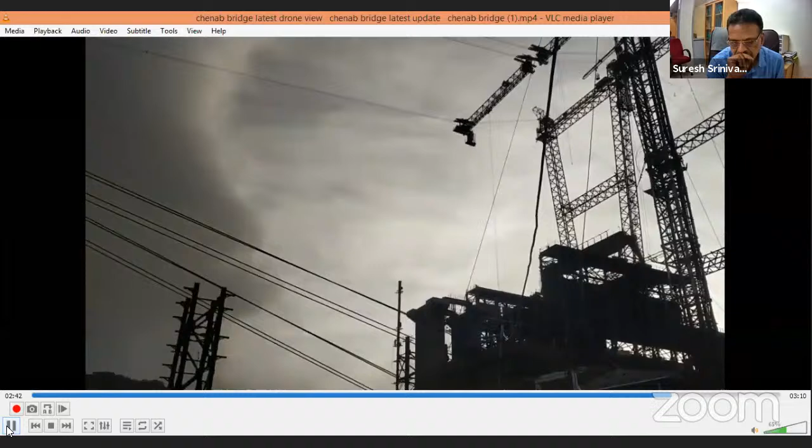So that is the latest position.

Are you able to see my slide? Not yet, no, you are not able to see. Look, the video clip ending is there. Now it's visible, sir. Now your slides are visible, sir.

So you saw the video. That gives you the latest position of the bridge where you saw the arch. The whole bridge contains three major groups of structures.

The voice is not audible. Now your voice is not audible. You have to come close to the mic, or some adjustment you have to make. Am I audible now? Okay.

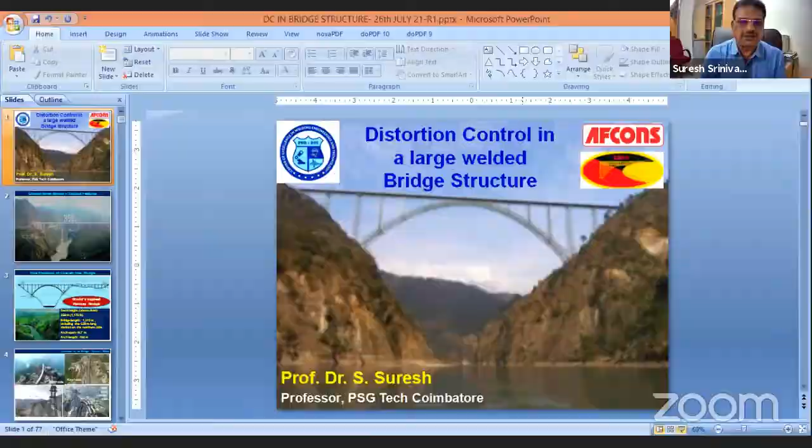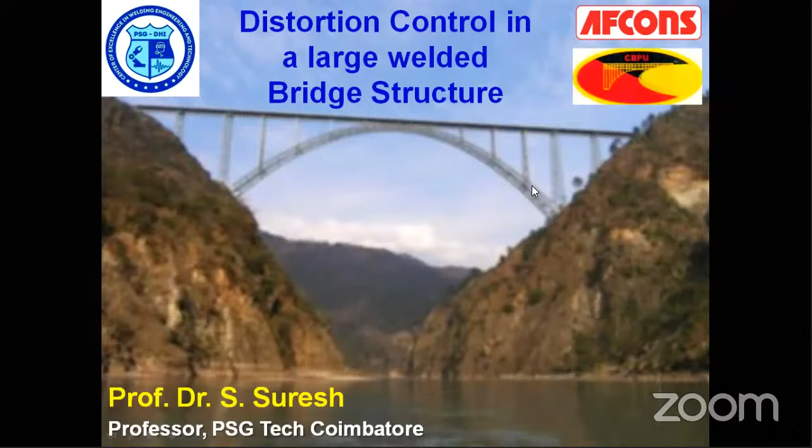Right, so what you saw is the arch of the bridge. The arch is the main structure which is going to take the load. You see the pier, which are the vertical sections. These vertical sections end up at the same plane where the deck structure is going to be installed and commissioned. So the top flat is the deck structure. The vertical supporting structure between the deck and the arch is called the pier, and then there is the arch structure. These are the three basic assembly structures of this bridge.

As you can see, and as you would have already seen in the video, there is no support on the river bed. So it is supported on either side of the mountain with a huge foundation, which is more than 30 to 50 feet or so. It's a rock and complete terrain environment.

Hello? I think everybody has to switch off their mic so that you can hear me.

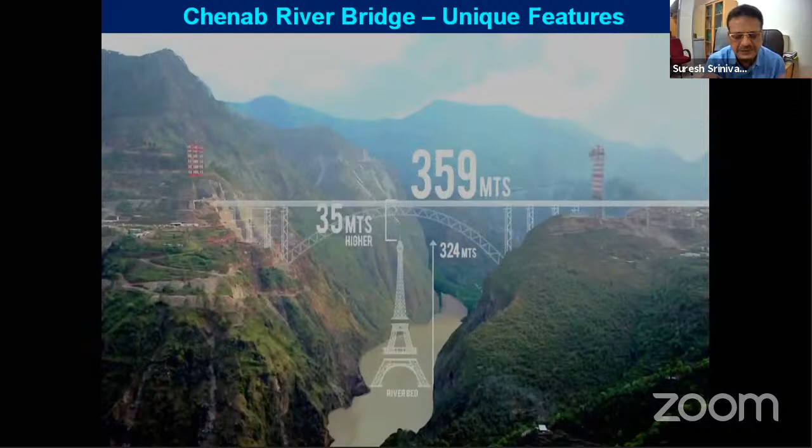This Afcons Infrastructure Mumbai is the main contractor who has taken up not only this bridge construction but, on either side of the bridge, there are two tunnels. On the left side, the Kauri side, and on the right side of the bridge, you have a 5-kilometer tunnel. 5 kilometers, please note that. It comes through two mountains, and the railway line is coming from Katra, Reasi to this place. After crossing this river, it will go through another tunnel of 2.5 kilometers. It's a very exciting project, which is going to be the icon of Indian construction of such a bridge.

As you see here, on one side you have a hilly terrain, not flat ground but an up and down mountainous terrain, so there are a lot of concrete piers coming here. Similarly on this side, you have the Kauri side with the 5-kilometer tunnel, and on the left, another tunnel on the Bakkal side. This is the river, and you have the arch, the pier, and the deck structure. So this is the overall elevation of the Chenab River Bridge.

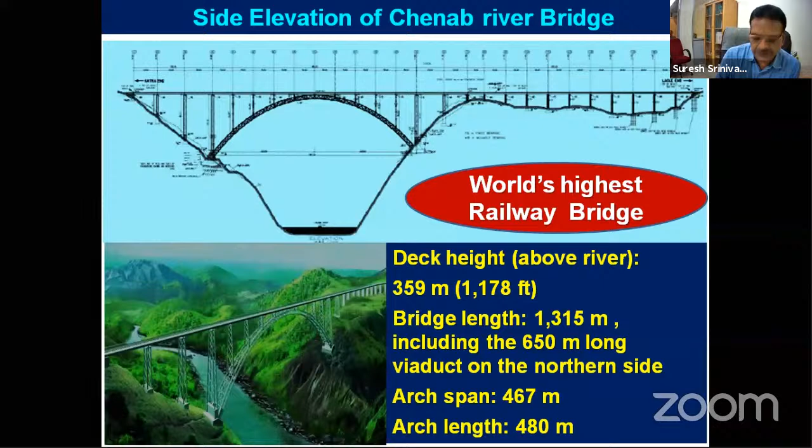Now you can see, as shown in the video, at the moment the arch is already fabricated and erected. All the three structures are welded and joined using high strength friction grip bolts, joining two typical structures. So it is a welded, bolted structure of the bridge.

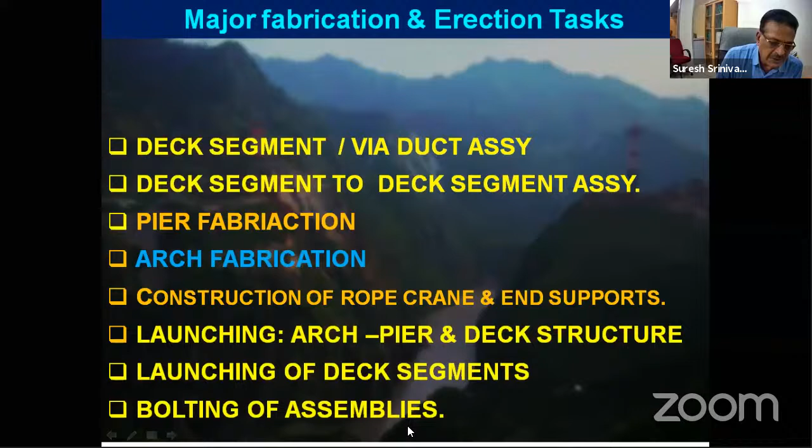And then we have pier fabrication, arch fabrication - I'm sorry, there's a spelling mistake, I'll correct it - construction of rope crane and end supports, launching of the arch, pier and deck structure, launching of the deck segment, and bolting of the assemblies. These are the major fabrication tasks that you have.

Coming to the challenges, this is a welded and bolted type of structure. The first challenge is you cannot transport a prefabricated structure to this site. As I told you, with the very narrow roads and lots of hairpin bends, you have to fabricate it near the bridge erection location.

Fabrication yards had to be constructed at the site, and all resources had to be moved from ground level to the site, which is about a 4 hour journey from the Jammu site. Handling facilities are inadequate, and environmental conditions are very harsh - pretty cold at night, hot in summer - and proper roads are not available. Launching of structures and erection is the toughest challenge, and it is planned from both sides of the bridge.

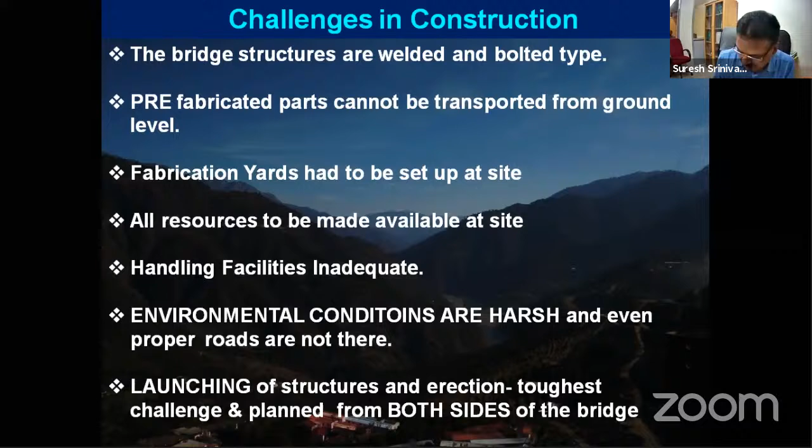Practically around 25,000 tons of fabrication was involved with welding and bolting. We fabricated 3 major assemblies: arch, pier, and deck structure. The materials used are E250 C grade carbon manganese steel and 410C HSLA steel, that is high strength low alloy steel, with a fine grain size of 7 and 8.

We had to choose this steel because in the arch structure we required very good toughness at -40, that was the design criterion. Thicknesses involved are 12 to 115 mm in various structures. The construction code was BS 5400 - it's a European design, so all ISO standards apply here.

It is a fatigue loaded structure, so it is fatigue design, and construction was made as per Part 10 of BS 5400. All features of the weld joints were done as per Part 11 of 5400.

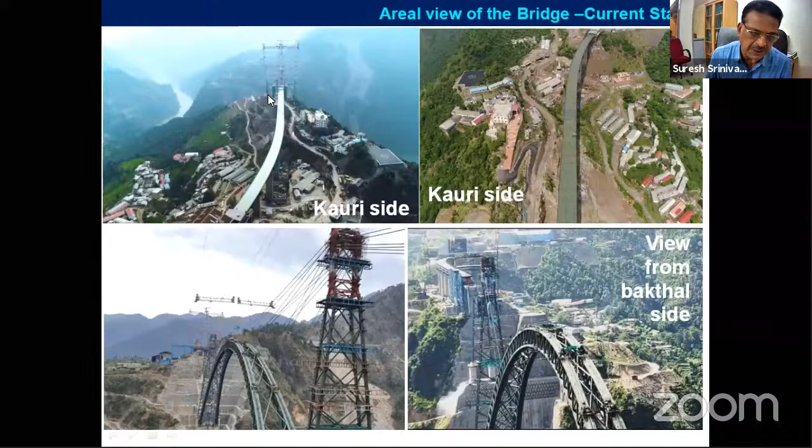The most critical requirement was distortion control, because the bridge has 2 curvatures. You would have seen this in the top view - if you look at this picture, you can see the curve of this deck structure in the ground. That's one curvature, and the other curvature is in the arch - you can see the arches are wider here, getting closer in the middle, and then becoming wider again.

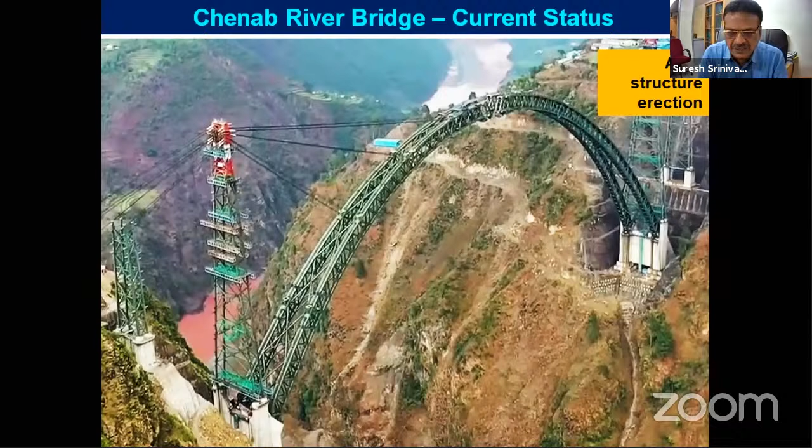So that means it is tilted inwards as well as there is a curvature outside. Both the arms of this arch structure are having an inward tilt, plus there is a curvature along the length. So it is a double curvature design to give an aesthetic view. This arch structure has got a double curvature.

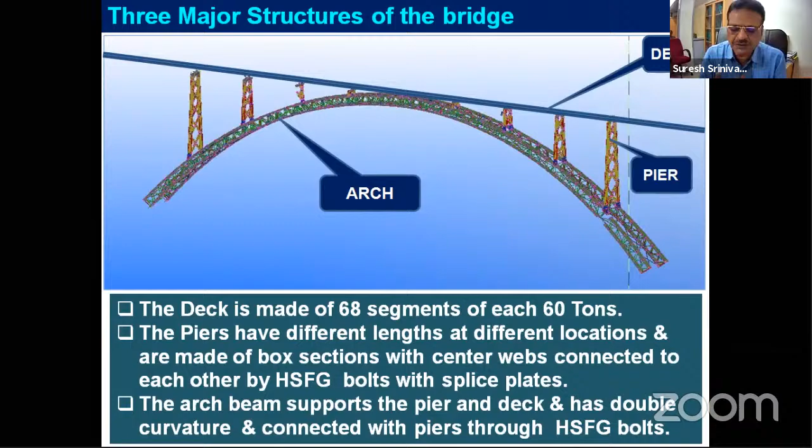Both the deck structure and the arch structure have got a double curvature, and the fitment tolerances, because you have to bolt each of these structures, plus minus 1 mm, 0.5 to 1 mm is the clearance given in the bolting between one structure and another. So this became a very big challenge, how we are going to control the distortion of this structure. This double structure had to be controlled in a very strict manner.

And we adopted both before welding and during welding methods to control this distortion. And we also did a lot of innovative things. As we go along, I'll tell you.

This erection had to be proved with a trial erection at the ground level, marking, then shifting it to the side. The welding procedure and the PQRs were done as per ISO 15614 standard, and the welding defects were evaluated as per ISO 5817. So completely European standards, ISO standards were used.

And I was serving, I'm still serving this Afcons structure as an IWE, that is International Welding Engineer support, which I am providing them. The welding processes used were gas metal arc welding, flux cored arc welding, submerged arc, stud welding, and SMAW to the minimum extent.

The maximum percentage of welding for these 25,000 tons was maximum SAW, next FCAW, stud welding, and minimum level of say 10% to 15% was only shielded metal arc welding.

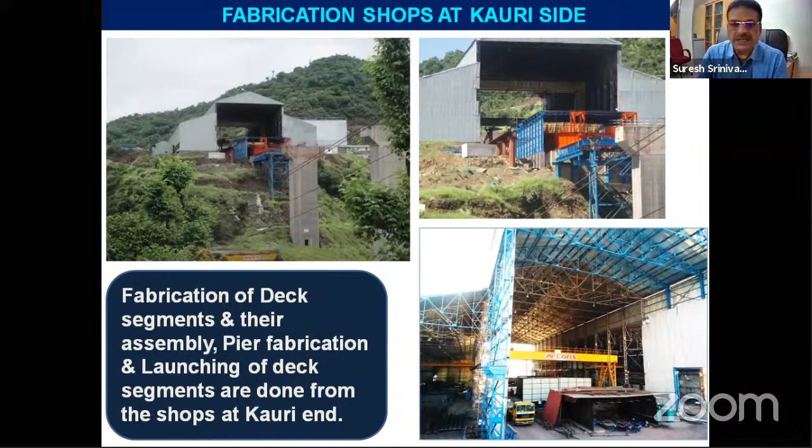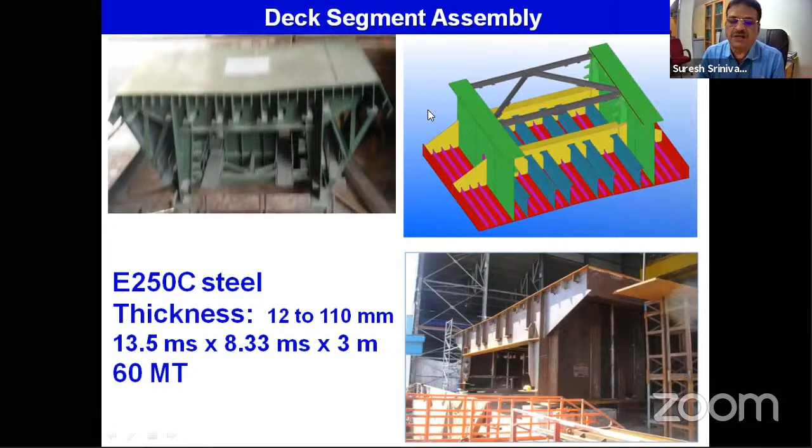So the total segment, and in the bottom you have box sections called lattice structure. This is one single segment, about 60 tons, and this segment contains about 25 longitudinal joints on the deck plate, about 8 to 10 butt joints in the deck plate, and box sections, lattice structure. Totally about 35 to 40 welded joints in this structure is what you see. Now you can see the Tekla, that is the solid model drawing of the whole structure, which again clarifies the type of structure.

So this is the deep webbed beam, this is the cross beam, and these are secondary beams, which are 6 in number. These are horizontal stiffeners, these are the cover plates, and the cross brackets between the main web and the edge of the segment. So this is the overall structure.

So what we do, we first make the structure, make another one, put it down on the erection bed, join them as an assembly, push it forward. The third one is first made, the first two are pushed out, third is pushed down from the shop level, then joined with the two pushed out. Again, the fourth one is made, put down, joined with the first one, two, three, and pushed along the length. So like this we keep launching: fabricate, assemble, launch, fabricate, assemble, launch. So this is the sequence of our fabrication.

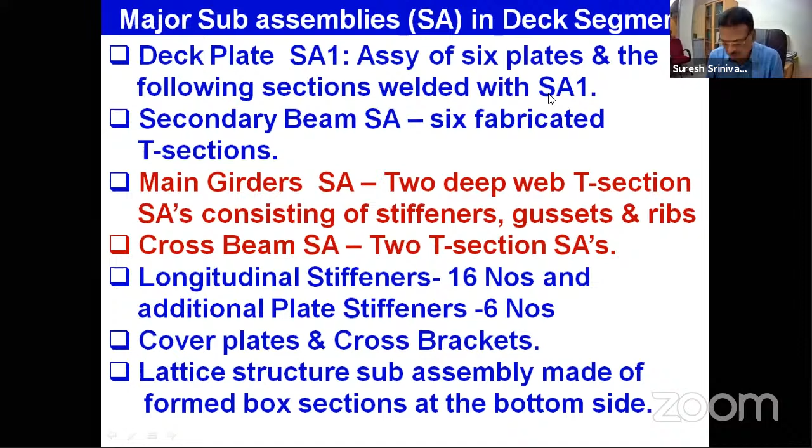So if you come to the main welding part, you have a deck plate subassembly which has 6 plates, and the following sections are welded as subassembly 1, where I'll show you now. For example, this is the base plate. The orange color is the base plate, where you can also see a small tilt in the diagram. This is not distortion in the figure, this is the pre-setting of the bridge, so that when rain comes, the water will automatically drain through the central hole. So you can also see there is a small curvature here. So these are 1, 2, 3, 4, 5, 6, 7, 8. These plates are joined together in this case.

Then horizontal stiffeners, longitudinal stiffeners are placed. Then cross beam structures are placed. Then vertical deep webbed girders are placed. So now you get the assembly. It is welded in a sequential manner, and then it is brought to this launch pad, and then it is lowered where it is assembled.

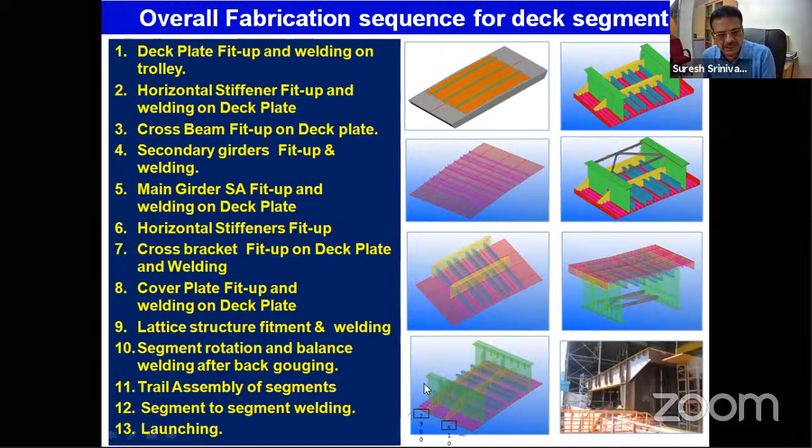So deck plate fit up and welding, horizontal stiffener, cross beam, secondary girders, main girder, horizontal stiffeners fit up - like this we go in a specific sequence. First deck plate is welded, then horizontal stiffeners, then cross beams, secondary beams, then cross beam to secondary beam in a sequential manner. In phase 2, we weld the horizontal stiffeners, cross brackets in a particular sequence.

We measure the distortion, and again, if there is a deviation, we change the sequence. In the second phase, we complete the welding so that the longitudinal diagonals, the squareness, the height, the width, and all the dimensions are as per the drawing. So this is what we have done.

So I'm getting into much more details now. So this is your deck plate assembly fixture, where we keep the deck plates and weld them. So you can see the curvature more closely. So here we have decided both the direction, the welding sequence and the weld sequence, such that the distortion is kept to the minimum.

And we used SysWeld software in our center to estimate the shrinkages. We could not use it for predicting the sequence, as for this structure, if you want to run an FEM analysis, we estimated it may take about 15 to 20 days. So that much time was not available. So we used this software for predicting the shrinkage, and then with my analytical method, we predicted the sequence and ran the sequence in the mockup. Once we got very good results, we applied it straight away into the actual structure.

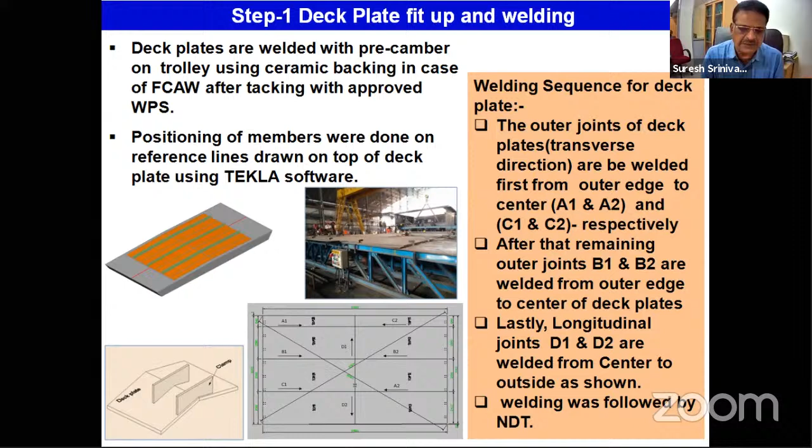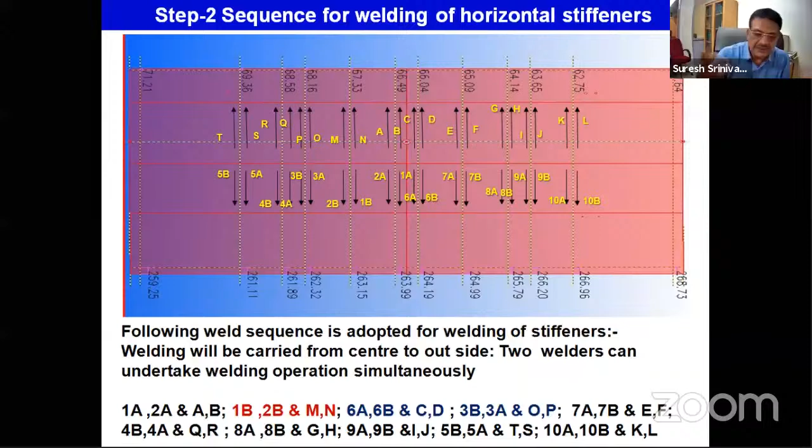So you can see the diagonals were being monitored after every stage of welding. And sometimes we use ceramic backing so that you need not turn the plate, because turning the assembly is a big job at the site, especially because we have a handicap with the lifting capacity. So here, if you see, we determine the welding sequence, welding direction, the welding order - everything was decided initially, and then we applied it on the mock-up. When everything is tested, we applied it on the actual structures. We applied sometimes 2 welders, 4 welders, according to the availability.

So then, after the deck plate is welded, I insert the secondary beam and the horizontal stiffeners, 6 of them - secondary beams. Now again, we applied the sequential welding at this stage. We had to do this step-by-step welding, because once you insert the main I-beam, the welder cannot go inside and get access properly. The welder will not be able to get the lead angle and the work angle for obtaining a good welding quality. So we had to consider that also in our welding sequence, the direction, etc.

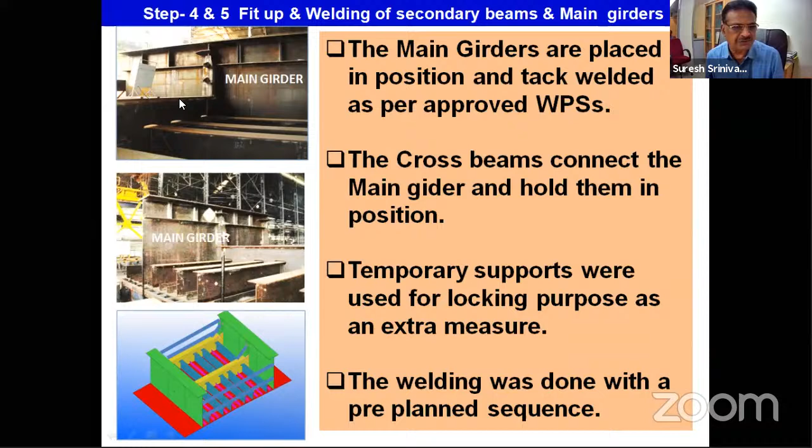So all these were predetermined and we applied the welding. Now you can see the main girder is already tacked or assembled. The secondary girders are in place. You can see the longitudinal stiffeners go through the cutting or the opening of these cross girders. So this is the main girder assembly, which is a big challenge for all of us.

All these secondary girders and cross girders were completely done in semi-automatic welding with a fixture which was designed at site and applied at site. So we had to do a lot of fixturing design, assembly, and then using it for actual fabrication.

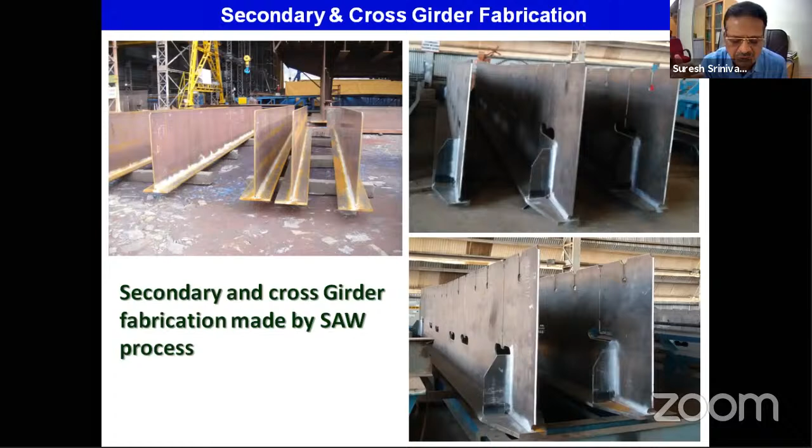Now this secondary girder to the flange are all full penetration double bevel fillet T-joints. So after welding one side, you had to back gouge, regrind and weld it again with semi-automatic welding. Sometimes when the thicknesses went more than 32, 43, etc., we did the root weld with GMAW, then the back gouging, again did the other side, then continued with SAW process with medium manganese wire and sometimes high manganese wire for getting the strength of the 450C material, 410C material.

Now this is the main girder assembly. As you see, this is about 2.5 to 3 meters height. And you have a horizontal stiffener plus vertical stiffener. The flange thickness is of the order of 63, 55, 45, and so on, depending upon whether it is at the starting of the bridge, middle of the bridge, or end of the bridge. So along the length of the bridge, the thickness of the flanges and web vary. So you have to have procedures accordingly.

Again, we applied a weld sequence such that the squareness of this plate does not have a bend or camber, so that welding with the deck plate will not create a problem for us. So these are the welding sequences followed.

And you can see the various snapshots of how we welded this main girder using the makeshift fabricated fixtures at site, and again automated or mechanized semi-automatic welding was done here, and then tilting it again, doing the welding after the back gouging, back grinding is done. So this is the tractor which we use for semi-automatic welding.

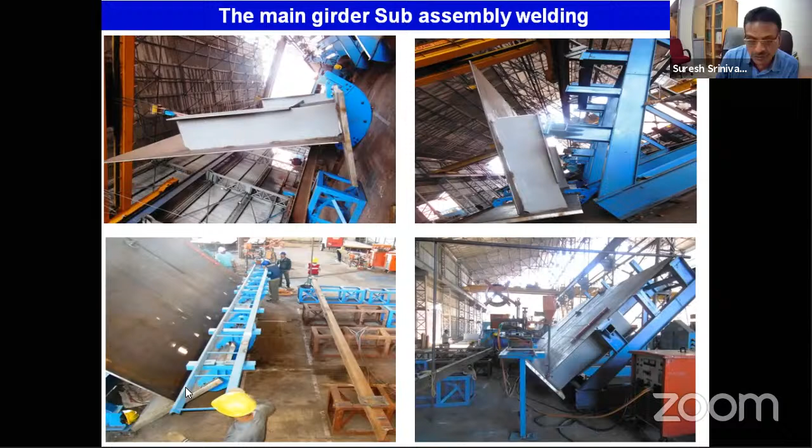So after that, we had to do the stiffener welding with GMAW, sometimes FCAW. If it is fillet weld, we use FCAW. If it is a groove weld, we use GMAW, because we felt that in a groove, there are chances for lack of fusion or penetration if the quality of the wire were not good enough. So we took a lot of precautions in establishing the process so that at any point of time, we should have a higher quality of construction. So that was being done here.

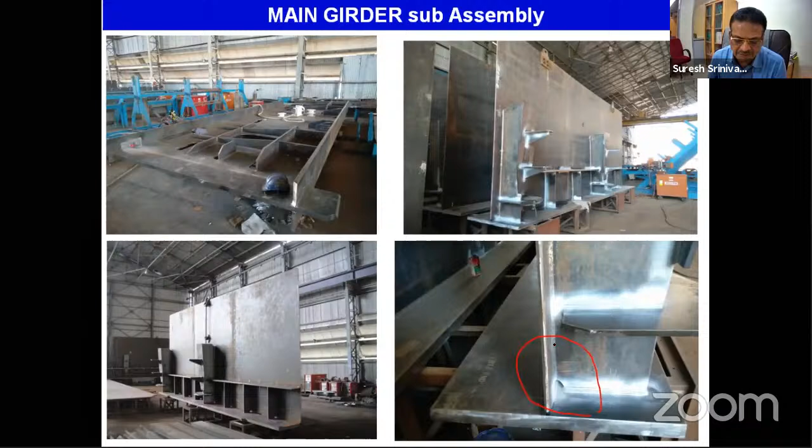So now coming to, now initially we keep the bridge... one second.

So initially we keep the bridge in the upside position where you are welding all this. Then we are doing the assembly welding. Sometimes we also use low cost automation techniques for welding the fillet weld after completing the groove weld. So this is how we went about welding the cross bracket inner parts of the construction.

So now we are coming to the assembly, fit up of one segment with another. So one segment of 68 tons is now assembled with another 68-ton segment. And you are also seeing we locked the entire structure using the lattice structure, which is again a box section structure, as you see from inside the bridge. This is already tilted upside down in this case.

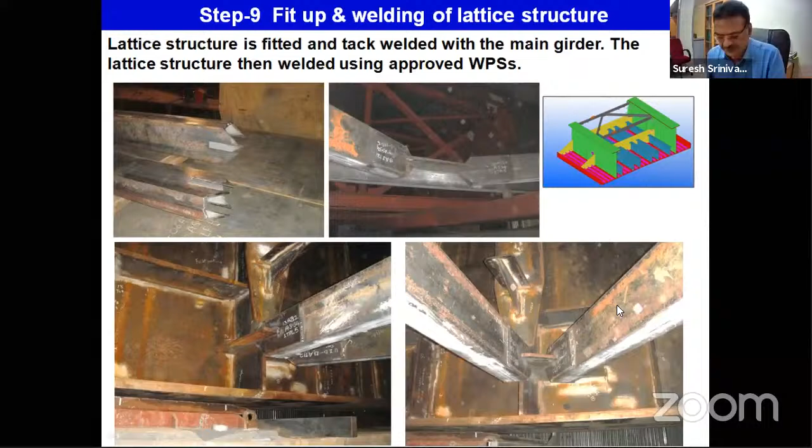Now for tilting, we again fabricated a huge A-type crane, both cranes, now lifting and tilting upside down. Because remember, the deck plate is only one side welded by SAW. After tilting, we back gouge completely and re-weld with semi-automatic welding to see that full penetration welds are made.

Now all these butt joints and critical full penetration joints were also tested by phased array ultrasonic testing technique. Both conventional UT as well as phased array techniques were used. At this point, I would like to thank our Dhanashekaran, who also helped us in establishing the procedures, giving his comments on how to go about evaluating this phased array UT technique, because till that time when we tested it, procedures were not available on the acceptance criteria of this phased array UT technique.

There were a lot of challenges faced in NDT as well. We established a laboratory at the site, which is a NABL accredited laboratory, because sending the specimens back and forth took a lot of time.

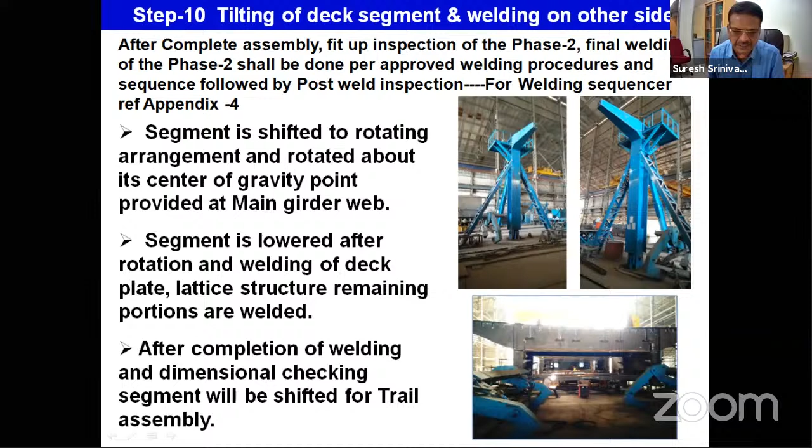This is for shifting, rotating, and lowering the deck segment. Now this is the position of the deck segment after rotation, which will be lowered downwards. This is the edge of the shop, and here below there is about 25 feet or less.

The deck segment is lowered and assembled with the already prefabricated first segment, welded and then pushed to the side. Now you can see a clear picture of the cross section.

In order to assemble one segment with another, we cut out about 300 to 400 mm on either side, fit up properly, then weld that also. So this assembly welding was very challenging, as you can see here.

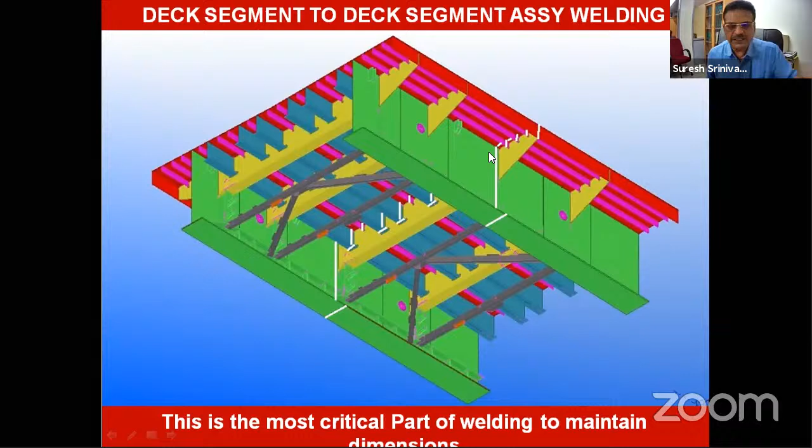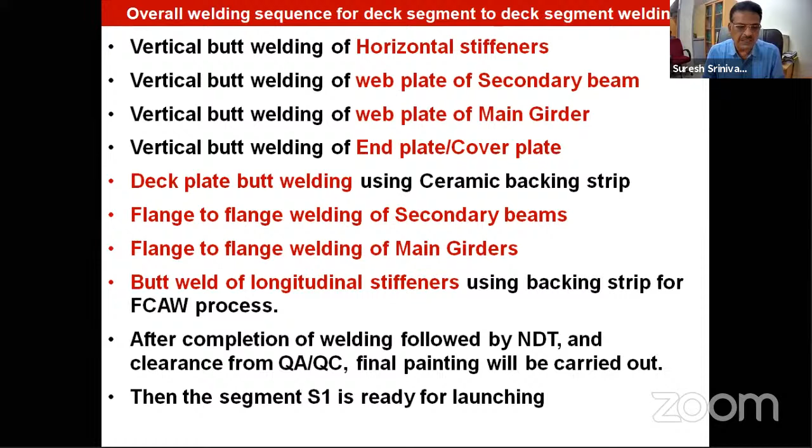This is one deck and another deck segment, and this white line is the assembly welding. So here, here, and here, you have about 16 main joints, nearly 25 joints all along the cross section - main web to web joint, flange to flange joint, web to web again, and flange to web. Totally along the cross section you have a lot of vertical butt welding, horizontal welding, and overhead welding.

After every set of welding, like when you weld longitudinal stiffeners, we stop and measure. Again after welding the secondary girders, we stop and measure. So it was a step-by-step procedure, because it is next to impossible to predict the distortion of such a large, complex structure.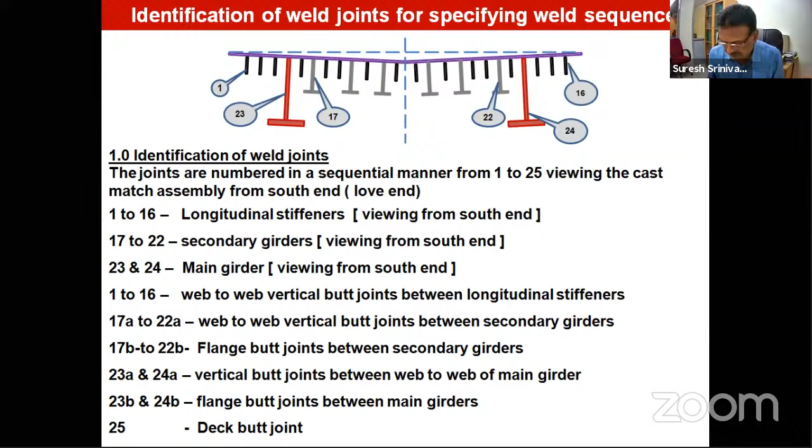You can see the bottom side view and how we went about welding in a very specific sequential manner. Totally there were 35 main joints in the deck-to-deck assembly, and the sequence was split into 2 stages. All are multi-pass welding.

We split that into 2 stages - stage 1 and stage 2 - where we do all the welding in a sequential way in stage 1, stop the welding, and get it quality checked: dimensional quality, whether the diagonals are okay, the length is okay, the width is okay. Then we restart the filler pass welding in a special sequence so that we get to the final dimensions.

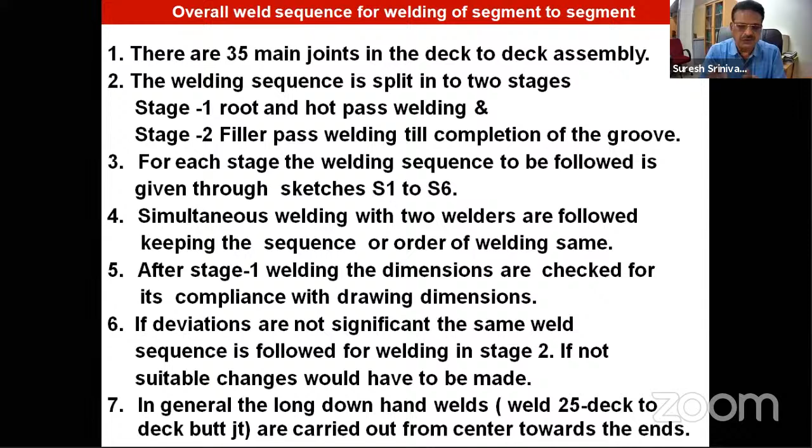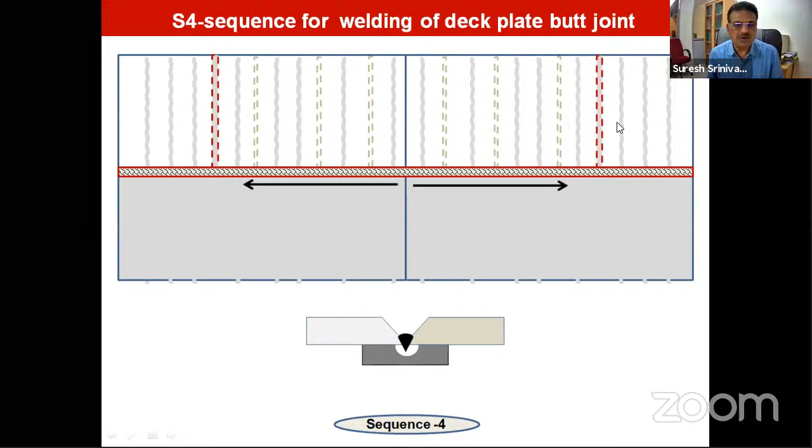If the deviations were not significant, we continue with stage 2. So we had to do this sequential welding, going from center towards the edges, welding alternately the web and flanges.

After completion of welding, we come to the top where we do the SAW welding after back gouging of the root and the first side weld. We do the final welding with submerged arc welding and test it by mechanized phased array UT, where the data was completely logged in the computer and evaluated by various inspection people as well as UT experts to clear this weld.

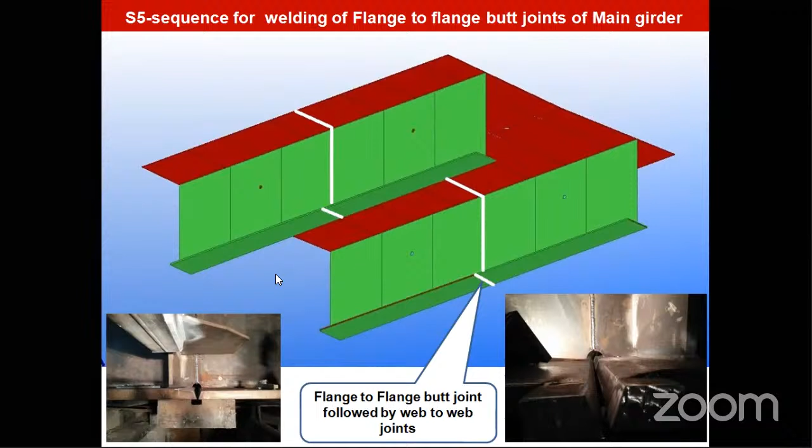This is the challenging job here - sorry for the slight deviation of this plate. One of the most challenging pieces was this main flange joint. There is already one vertical joint with two fillet welds here, and the main butt joint.

Normally, for controlling distortion, anybody would have preferred a double V joint here. But here, as you see, it is a single V, mainly because the railways did not allow us to do overhead welding, as they felt overhead welding cannot produce a good quality weld.

So what we had to do was go for a ceramic backing joint from the top side for the root welding. After welding this, we went about welding in a multi-pass joint, as any single V butt weld will produce heavy distortion.

When we first welded this in the mock-up, we faced a problem of buckling of the web plate. We immediately told the designers, and this buckling was avoided by putting extra stiffeners, since compressive stresses were introduced due to the angular distortion caused by welding on this web plate.

So we had to change the web plate design by introducing two more stiffeners on either side of the butt joint. This was suggested by me and accepted by the designers as well. What happened was, because there is going to be heavy stress in this plate...

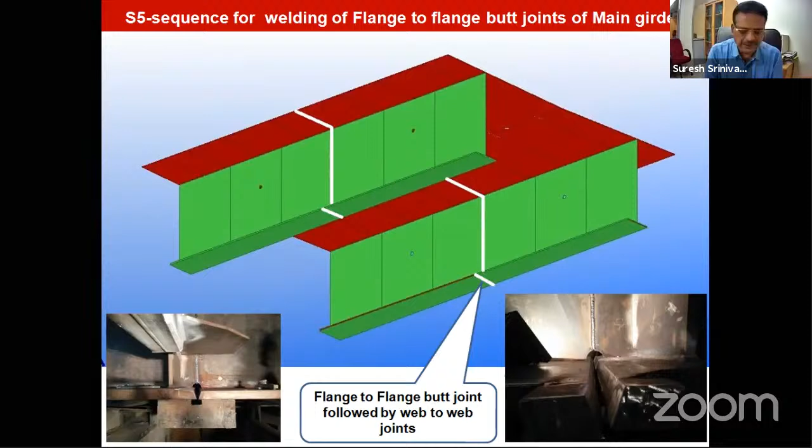So we did stress relieving of all these joints, especially this joint you see here, especially above 50mm we had to go for it, because the joint is under heavy restraint condition, the residual stress is likely to be active in all three directions. And if you take a small element from this weld, it will be subjected to a triaxial stress state. So this is what we did here.

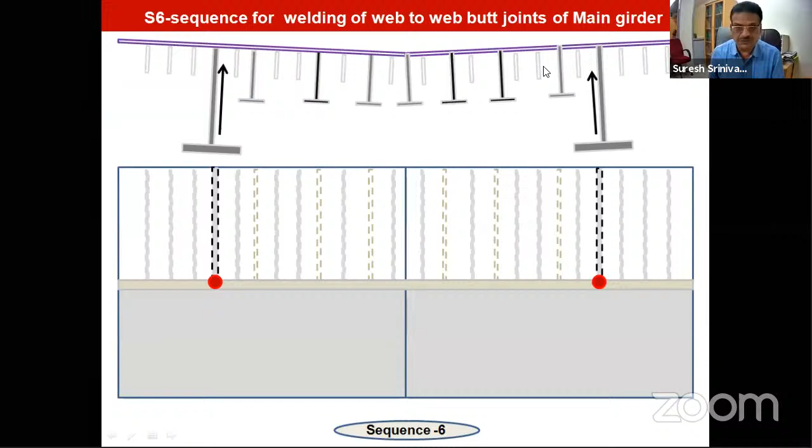All the welding directions are also seen here. Once we complete, now you can see from this shop, three segments have already come out. This is the launching nose, as we call it. So when we push from here, this launching nose goes and sits here, and it drags this segment and then moves along.

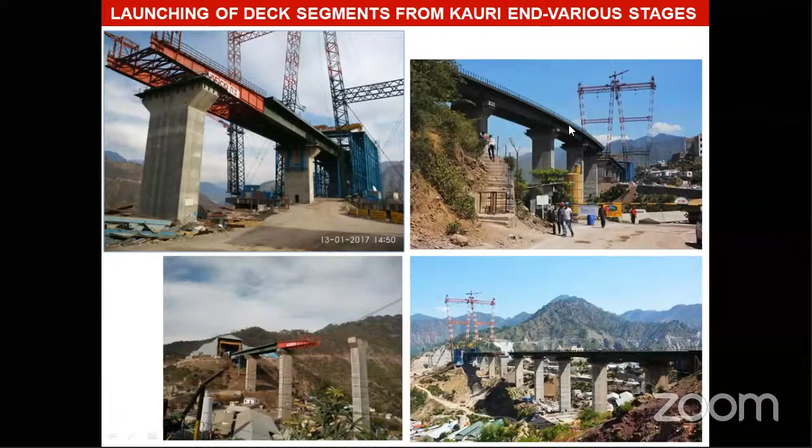As you see here from the other side, you can see the deck structure is pushed from one side and the launching nose is coming out. You can see from the shop, it has come out so far. At ground level, you are seeing a lot of concrete piers holding the deck plate, and this is the rope crane mast which is going to handle this above the river. So that is with respect to the deck section.

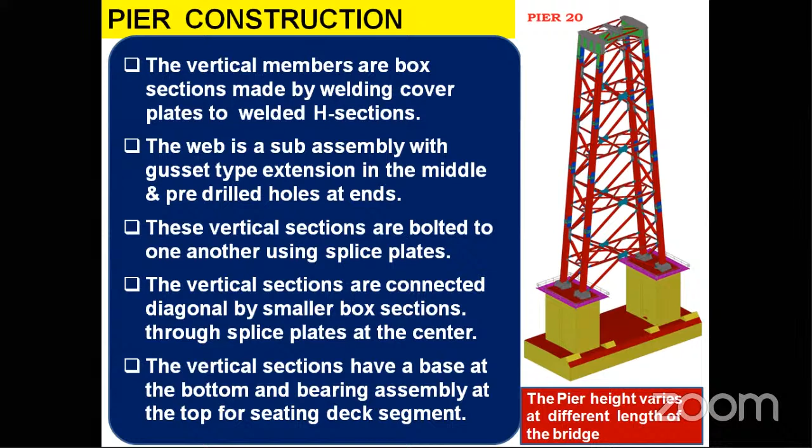Now coming to the pier, we had established a separate shop for pier fabrication. This is pier 20, a typical pier 20. All four are box sections. The height varies and the vertical members are box sections, as you see, and they are not simply box sections - they are boxed with a central web plate as well. The central web plate protrudes at all those nodal points to which the cross members will be connected. So it's a very unique design.

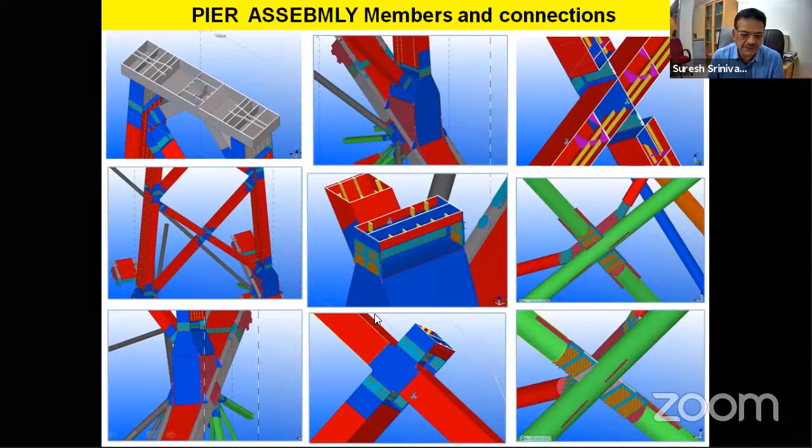You can see the snapshot of this SolidWorks model, where you can see the top bearing plate assembly, and these are coming out of the web plate of the central pier section. I think you will understand soon what I mean. These are already pre-drilled and welded, and they have to match perfectly with the matching section of the assembly. Remember, our tolerance is plus minus 1.5 along the length of the beam.

Each length of the pier section will be 11 meters, 12 meters, and so on, so we are expecting a very close tolerance after welding. Now you can see what is coming out - through this web plate, this comes out. You can see the box section: this is the top flange, bottom flange, and the side web plate. And can you see this? Through this web plate, another link plate is coming to which the connections will be made. A very interesting typical cross section.

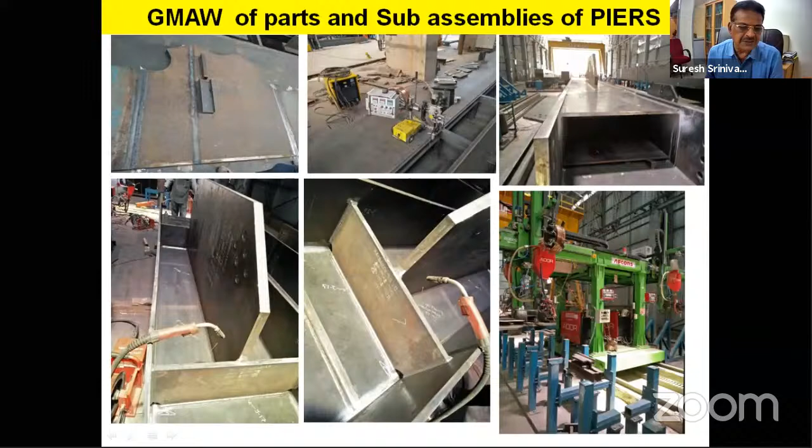So we used mechanized sub-arc welding for welding all these corner joints with bevel fillet corner joints. These are the joint designs we use, whereas here the inside welding is done by GMAW or flux core welding as the case was.

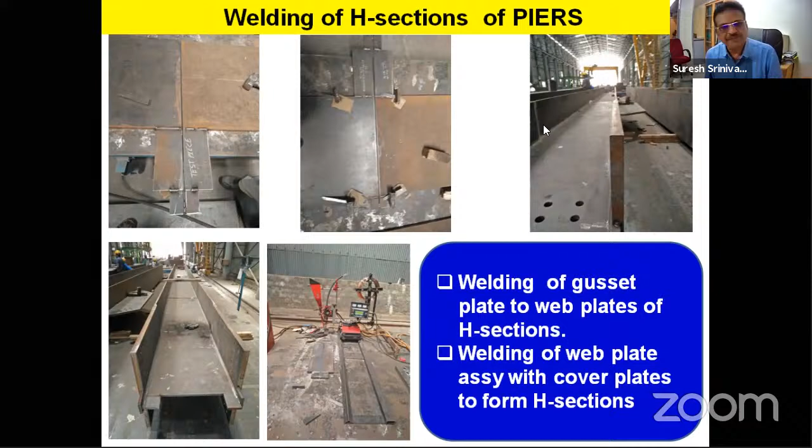You can see first we make the I section. You can see in the ends it is thicker, in the middle it is thinner - all these thickness variations are also there, for both flanges and webs. So all these joints were made by sub-arc welding, and you can see now the construction.

First I make the I section by sub-arc welding. This web plate is welded with the two flange plates. Then I insert one web plate here, a closure plate, another closure plate. It becomes a box with a central web plate as well.

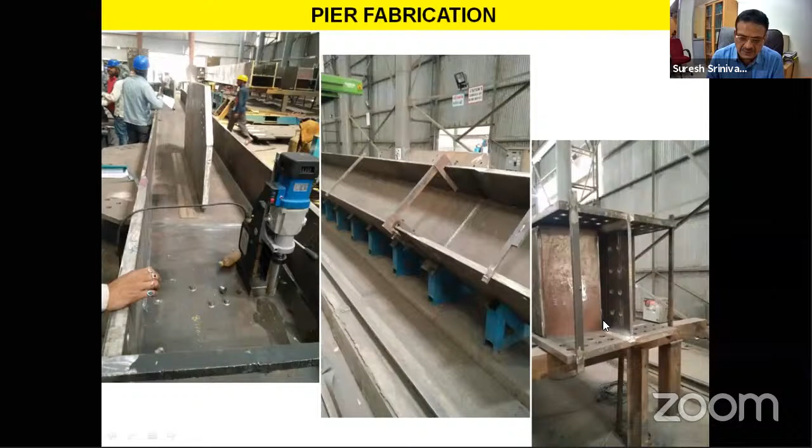This is a typical cross section. Here the drilling was made in situ for connecting it with the other sections. You can see the web is protruding out where the connection, the bolt holes are already made, both on the flange, top flange, bottom flange, and on the web plate.

Edge preparation is already done on this plate so that it can be connected to the other plates. You can see the plate in condition, preheating of the corner joint and welding taking place along the edge of this corner box section, corner joint with a bevel plus fillet. This was the construction feature, and you can see the weld being completed.

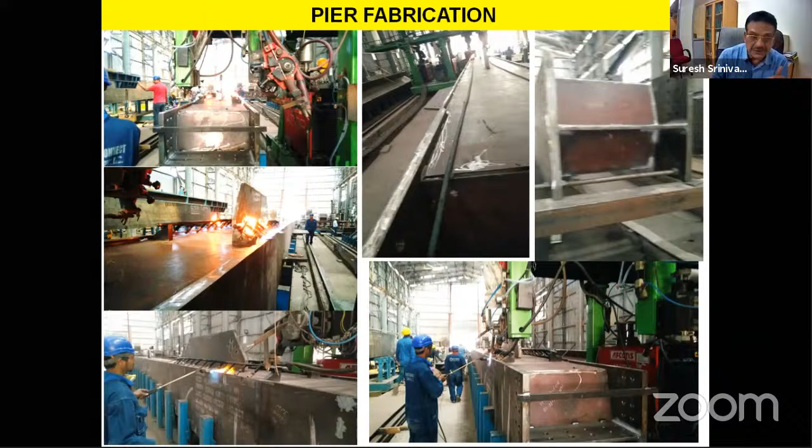The view gives you also the distortion control of the entire beam above box section. It's about, if I am right, 14 to 16 meters or so. This is the completed pier section through which the gusset plate is coming out, already welded inside with the web plate as well as the outer web as well as inner web. This is the close-up view of the sub-arc welding of the box section.

This is the fully completed pier fabricated beam, where this is the outer flange, inner flange, the middle flange to which this gusset plate is coming out. The ends are all gusset bolted. For bolting, you already have the drilling in place.

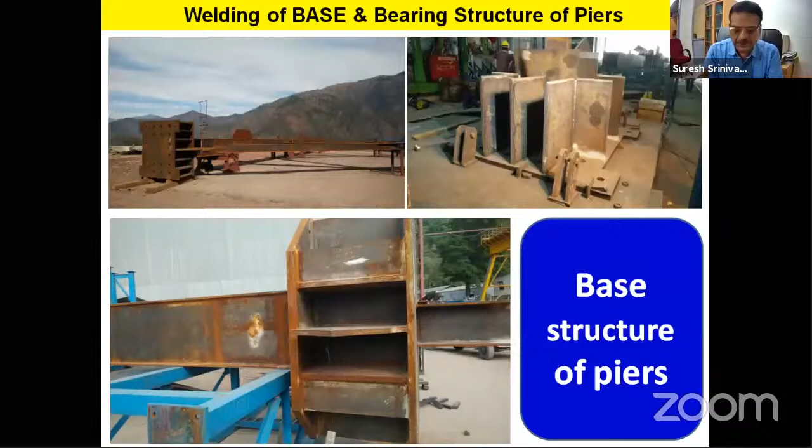Incidentally, welding was by Afcons, with one agency for welding and 7 agencies for inspection. Very interesting - RDSO, ISO, railways, Afcons, KRCL, and so many other agencies are checking the alignments, both for alignment of the edges as well as matching of the holes.

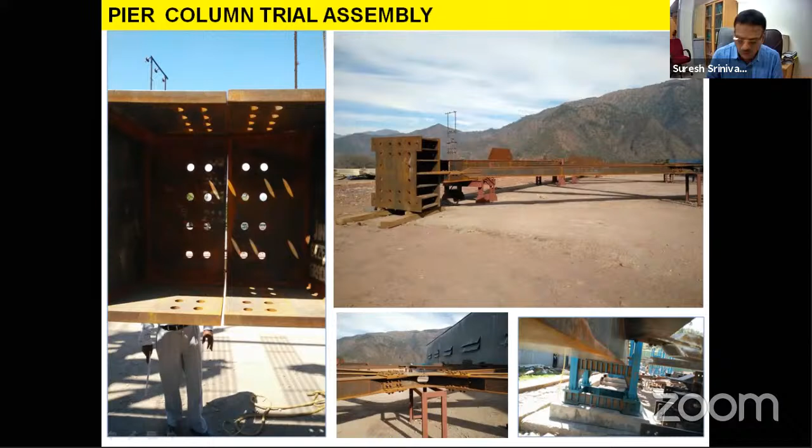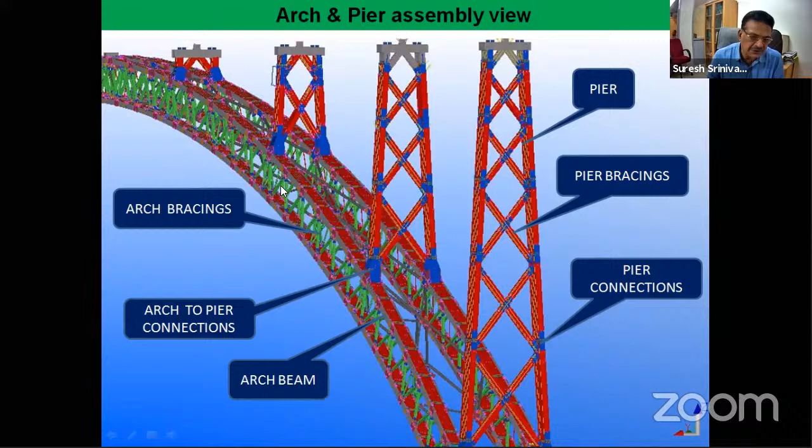Now coming to the arch structure, which you saw, the arch structure is the bracing between the two, top arch, bottom arch, left side, right side. So there are 4 arch box sections. These two are connected, top as well as bottom, through these green arch bracings, as you see here. So the box sections of the arch have double curvature, as I told you, in 2 directions along the length.

The ends of the sections are pre-drilled and are connected. The arch beam comprises of 2 parts, left and right - left side top, left side bottom. Here again, from the arch, the gusset plates are coming out, to which the other gusset plate of the pier will be connected. So this is the typical construction.

Now you can see the cross section of the arch plate. There are 2 box sections connected with the flange. These flanges have T sections running right through. So typical 2 box sections at the edges with a flange plate connected by completely longitudinally running T sections right through the arch section. One typical arch section will be of the order of 12 to 16 meters according to the location where it is used.

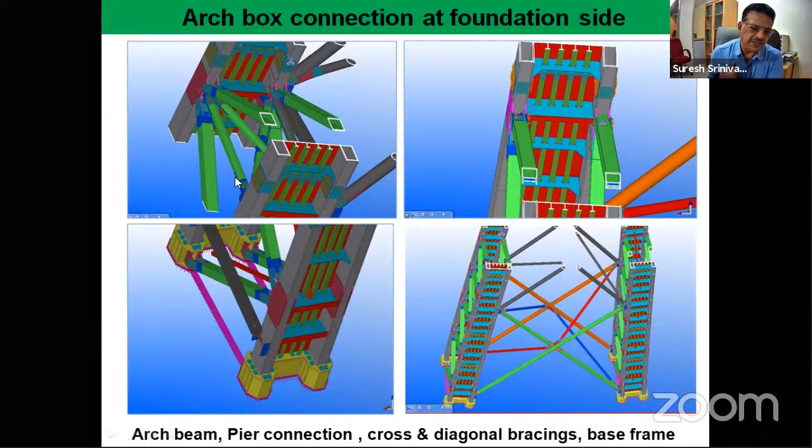And these are box section bracings. Green is the bracings of this cross section. These are nodal points wherein the deck also we have a gusset plate to which these things will be welded. Similarly, in the bottom, this is the top arch and the bottom arch, you have a protrusion of the gusset plate to which these will be welded.

So this is the cross section where there is the left side box, right side box, and 3 major T stiffeners welded. Inside, you have stud welds, and all these stud welds are made by arc stud welding process on the side. After completing, through this manhole, we will be filling up with concrete completely. So it becomes a very rigid section with outer wall as the steel box and inner completely filled with concrete. It's a huge, heavy structure.

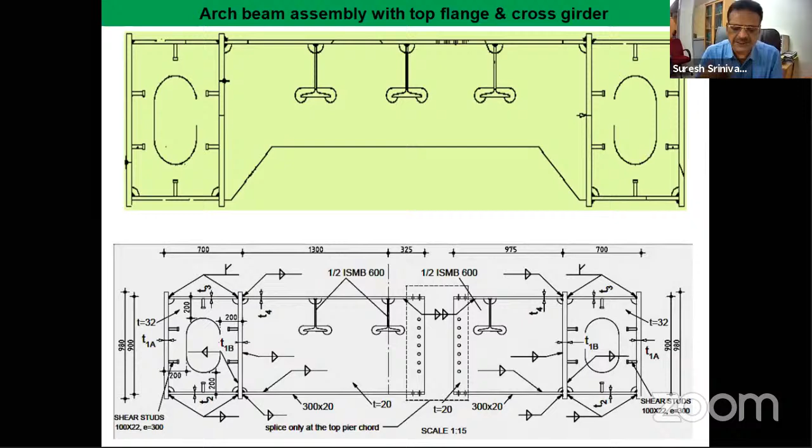Once it is erected, nothing can shake this structure, and it can withstand the highest wind speed of a hurricane. That is the kind of design made.

This is the gusset plate, as I told you, which protrudes from the arch section, to which the pier gusset plates will be welded. Again, they are pre-drilled, and butt joint is welded with back gouging, and suitable clamps are used. Now you can see the already drilled plate.

There are a lot of butt joints in this gusset plate. Here's another butt joint. All are UT tested, both conventional and phased array ultrasonic testing.

These are the stud welds which were done and tested before fabrication, before attempting to do the actual welding. These are CNC drilling machines for drilling these holes with very high accuracy.

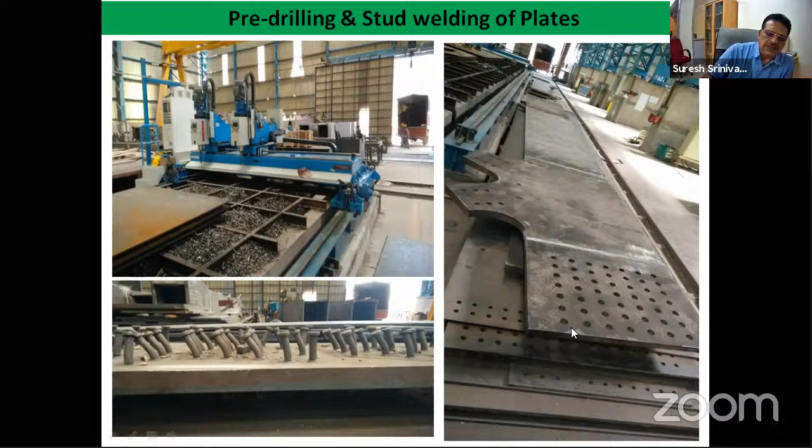So they are all stacked together, matched and welded. And after welding, again we check the alignment, PCD, etc. with go and no-go gauges.

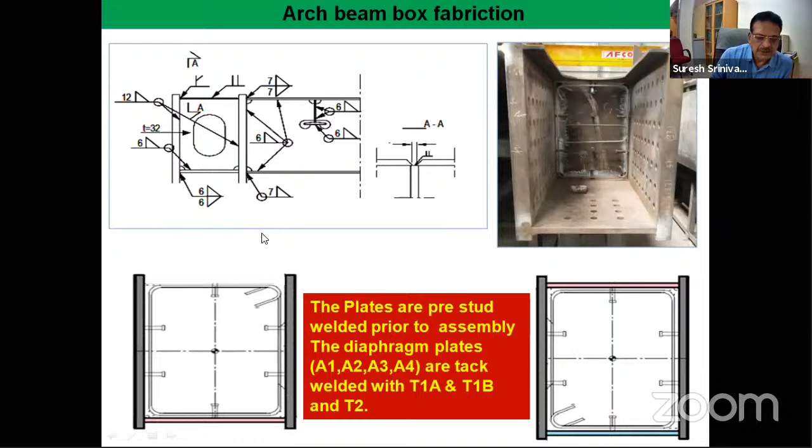You can see the inside section of the right side, left side web. This is the top flange and the bottom flange. At the ends, they are already drilled for splice plate welding, splice plate connection between one arch structure and another arch structure. All welds are also shown here - you can see 6 mm, 12 mm, double fillet, all round fillets, etc.

Now you are seeing the fabrication where the stud welds have already been made and the pre-drilling is already available. First we do this, then put the diaphragm plates with holes for pushing the concrete inside. After that, we put the left side plate, right side plate, complete the welding, put the fourth plate, and then close the box with proper welding and testing.

This is the diaphragm plate for this box section. You are seeing 12 mm fillets done on either side. Here we do single fillet from inside, and outside we do bevel plus fillet, because inside you can't go in after putting the fourth plate.

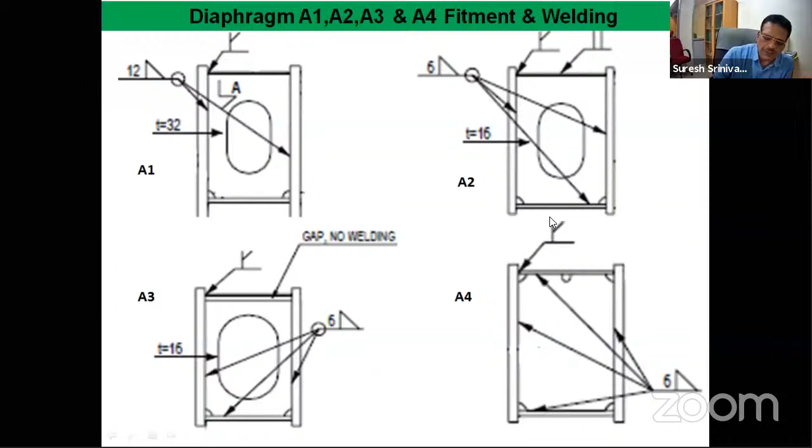That's how the design and fabrication was done. Now you can see the left side plate, the right side plate is done, and the flange plate is done. We do all the stud welds as seen here. We have welded this plate, diaphragm plates, with fillet welds.

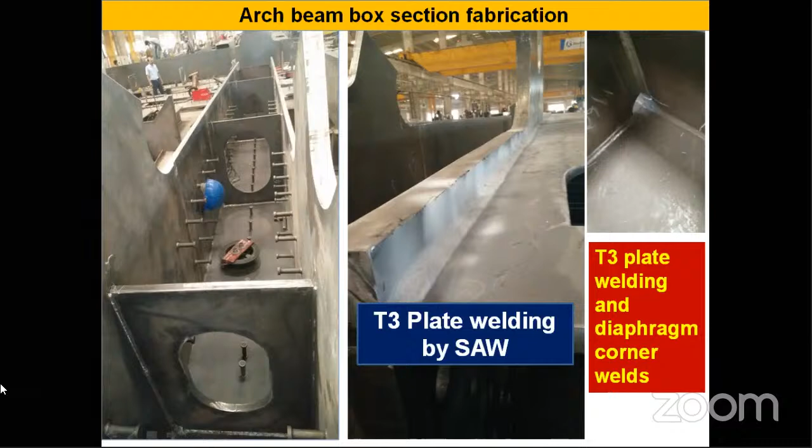Now we do all the checks inside. Then we put the fourth plate. Once it is covered, it is difficult for the welder to go inside, so only certain welders can go inside and weld it. This is how the fabrication of the arch structure was done.

Here you can see the cross section. First we do this bottom plate to top plate, then diaphragm plates, then put the fourth plate and complete the assembly. This is the completed assembly of a T3 plate - T3 being top plate, side plate, web plate, right side plate, etc. This is the gusset plate where the welding is done.

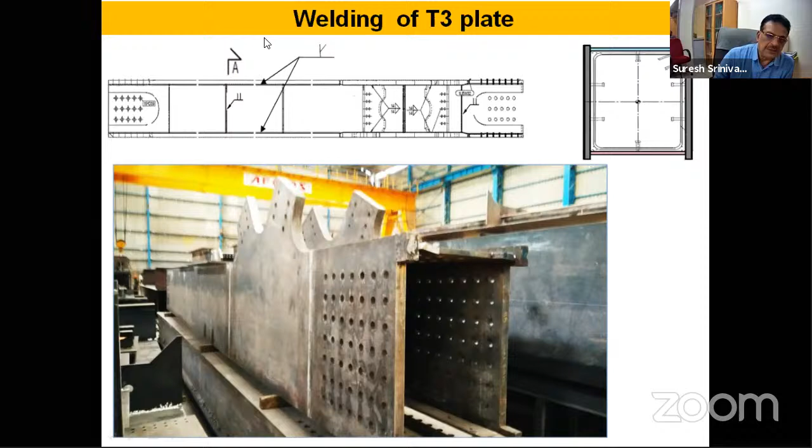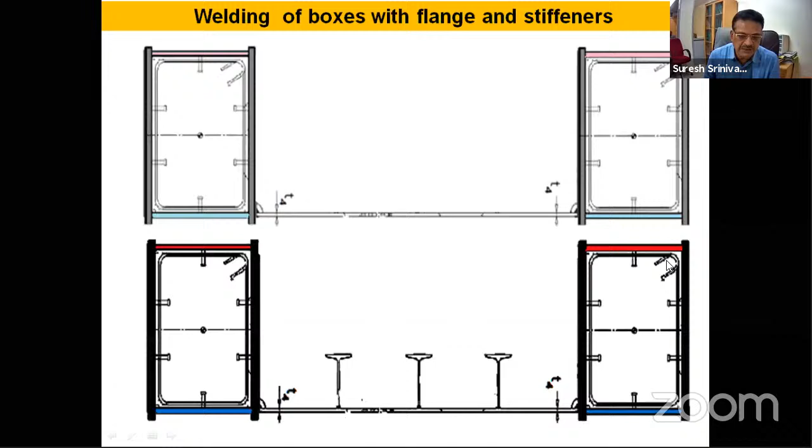After doing this section, we come to the flange section. Here, one left side and right side is already done. Now we are putting this plate in which T stiffeners are welded to make the assembly. These T stiffeners - you can see this is the box section, right, left, and the flange plates are welded to both sides of the box. This is welded using GMAW, sometimes FCAW, and this whole section is now ready.

You also have a cross beam, a cross stiffener, which holds this box completely. This assembly is now shipped to the site. You have top one, bottom one. We put also the bracing, and as a whole we take it to the site. For individual assembly, we take care that it does not exceed 30 tons per piece, so that erection is completely possible.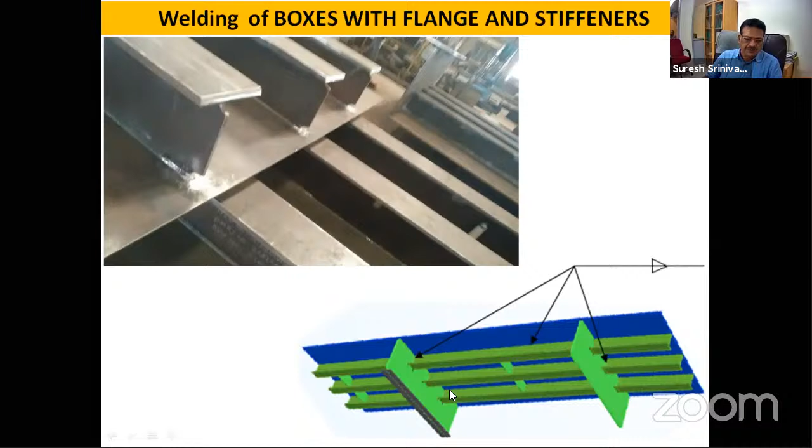So what you see is a typical assembly which is completed - the whole assembly with cross beam, longitudinal section, and the plate. Now you can see the actual section: left side box, right side box, flange plate with T stiffeners and cross stiffeners. This is the arch box section with the flange and stiffener, known as the arch beam assembly.

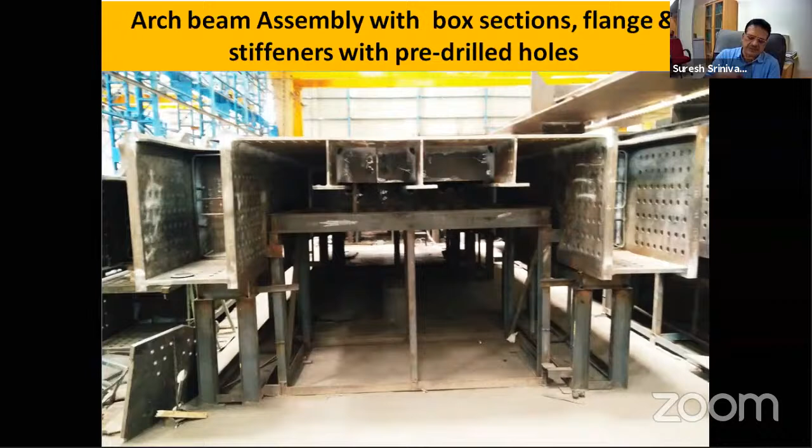This is further connected with the bracing and then taken to the site and welded. These are the bracings as you see here - again, box section with gusset plates. You can see the gusset plates connection to which these bracings will be connected. The top arch assembly and the bottom arch assembly are connected through this gusset plate, shown here in green.

This is called the bracing. It is connected both top and bottom, as well as left and right side, left side top, right side top, and left bottom. So there is bracing both this way and cross way.

The bracings connect the four together as a full arch assembly. These are the foundations over which the arch will be erected, one on the left, one on the right. From the foundation, a gusset plate comes out to which these box sections will be assembled. You are seeing the foundation and erection of the base frame, which is a huge box of about 6 feet in height, though it looks small in the photograph.

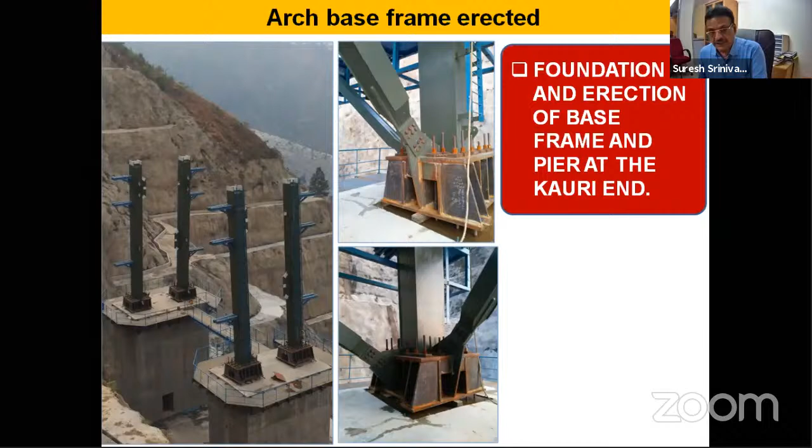So this is how the frame was done. From here we start moving. It is held in a rope crane as well as the pier section. After this we connect another one, bolt it, and take the rope crane. You can see the rope crane mast here, though I don't know if this picture is clear.

You can see a dark line here - this is the rope crane, and also another crane which is holding the arch section until you put another arch and bolt it, until which it will be holding. Then the load is transferred to the left side. As for the right side, there are a lot of mechanisms for that. So slowly the arch is coming from either side.

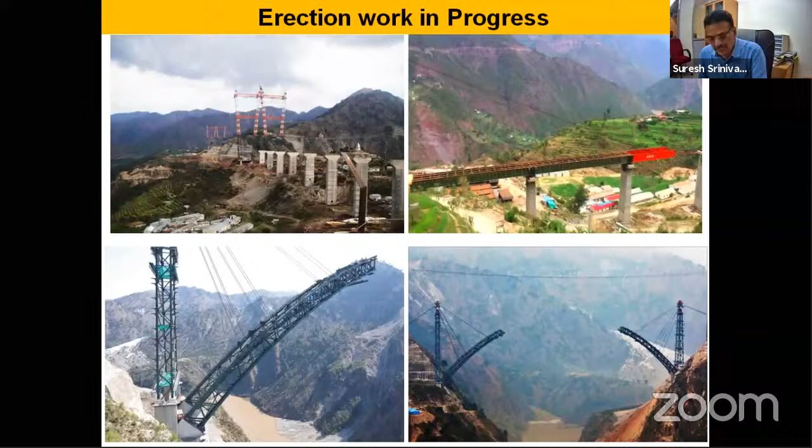And finally, today, what you saw in the video is that the arch structure erection is completed. The pier sections are in progress. The launching of the deck segments has come to the place where the river bed is. And the project will be completed by 2022.

So that is an overview of the welding details and construction details, where we are today in this prestigious project of the Government of India. We from WRI started this project way back in 2006-7 or so. At that time we had our Uma Shankar, who was also coordinating this project. Subsequently, the project took a little time.

Suddenly the railways changed the specification from a single line to double line. So when it became double line, the design had to be completely redone and the entire procedures had to be redone, all undone. For the past 1 year we have been affected by the COVID restrictions.

So again the site has started construction, and I wish the AFCONS team a very big success. Now only the erection work is going on. All the welding work had been completed by end of 2019 or 2020. So only the erection work is in progress now.

Hello? See, the project cost means road laying, site fabrication, site construction - maybe about 5,000 crores or so, around that. What is the cycle time? Is it 10 years sir, from when it was started?

See, the problem was it started well, but a lot of hiccups were there along the way. Suddenly, until 2014, the bridge construction was going at a very slow pace. Especially after 2018 or so, the real speed has picked up. Originally, it was supposed to be completed in 2019-20, but because of COVID restrictions and so on, the schedule is now December 2022.

Yes, sir, so I have had a great pleasure in listening to your presentation. Thank you, and I really enjoyed it. From the moment I started it, every moment was enjoyable, and it was like listening to a story. You narrated it in such a way, it's all beautifully done, sir. Thank you.

Thank you, Suresh, for very nicely outlining some of the complicated problems you faced in solving the most important problem. This is going to be a very good, prestigious project for India. Thank you, sir, for joining us and sparing your time.

Thank you very much. Hello, Suresh sir, I have some questions. Good evening, sir, my name is Batmanaban. Where are the plates procured from, sir, for this fabrication, all the structural plates?

It's again another story. See, there are so many stories here which I couldn't cover. Actually, originally, we ordered the plates from Rourkela and I think one more plant, if I'm right. Originally, we wanted to have a normalized and tempered steel plate, E250C and so on, because the specification called for isotropic properties - that is, the properties in all directions to be the same. So we wanted a normalized tempered steel plate, but the steel mills were ready to offer only controlled rolled steel. So there was a very big argument between RDSO, the railways organization, and the steel mills.